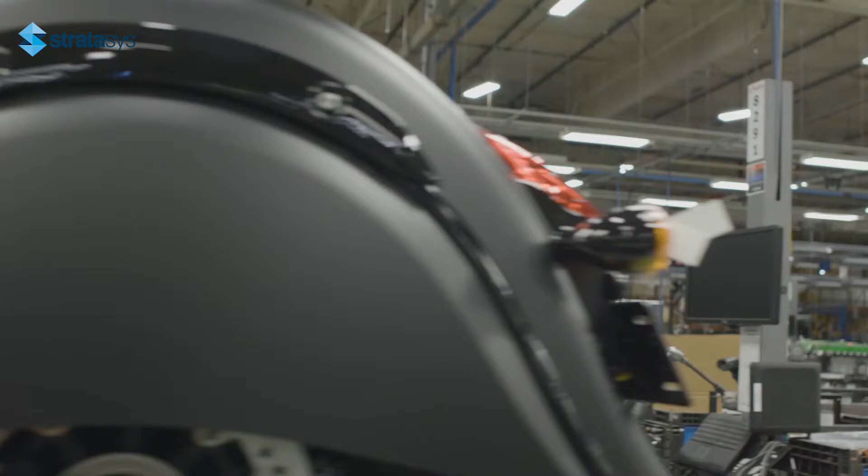3D printing isn't just a technology, but it's a new way of thinking about technology. We face enormous environmental and social challenges in the world today.

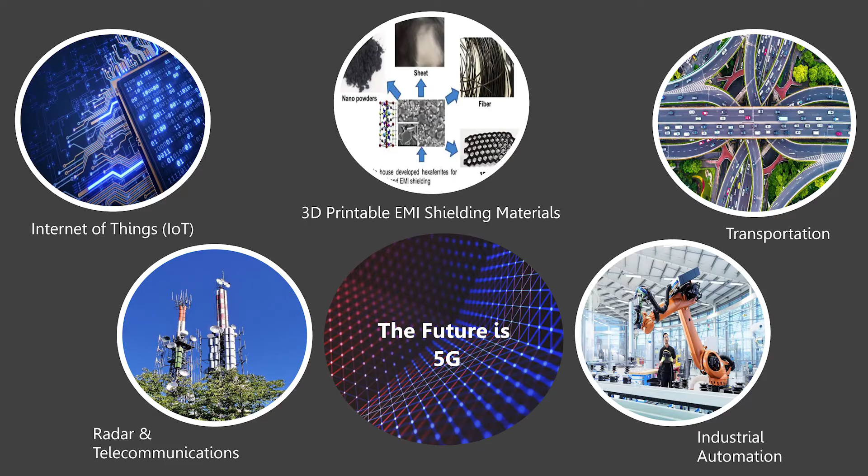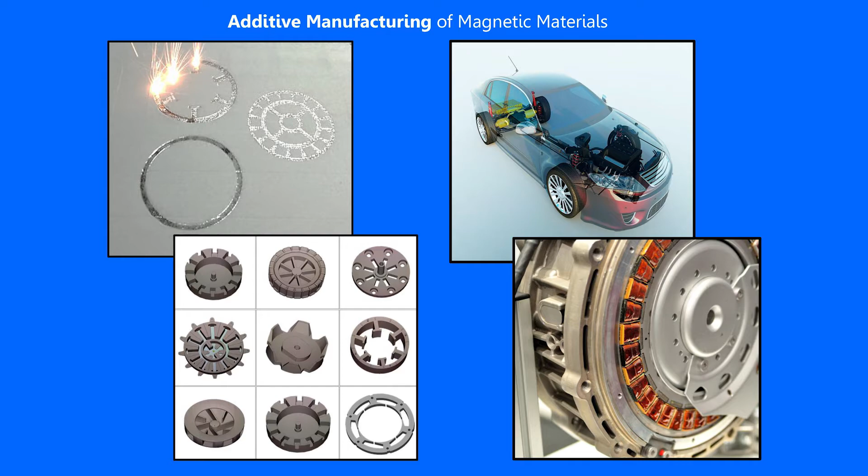3D printing brings together advances in machine learning, topology optimization, powder metallurgy, and machine design to build parts while minimizing manpower, energy, and materials waste. All of these gains can be achieved while producing functionally more powerful products. This is truly a new industrial revolution.

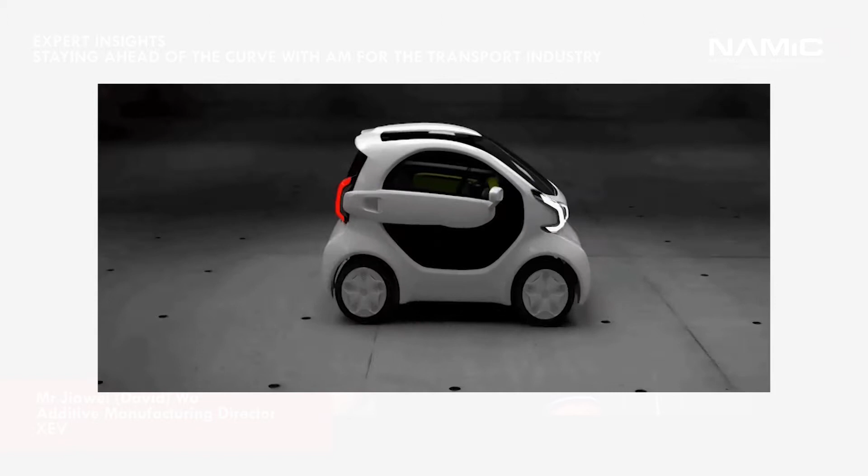There will be a bright future for 3D printing, and it will help us rethink the production process for automaking. And in a very short time, because of the trend of electrical cars and also auto driving, this kind of new technology will change how people think about cars.

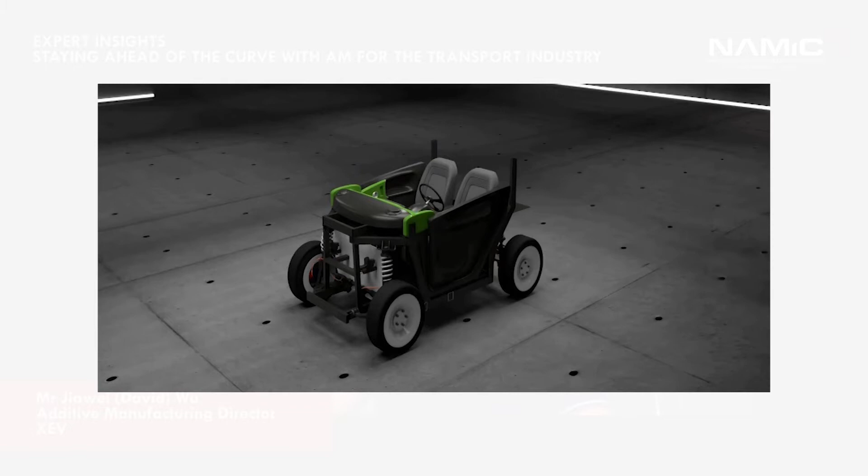You will have the willingness to customize your car in the future once you have the chance. It will be part of your personal identity, I would say.

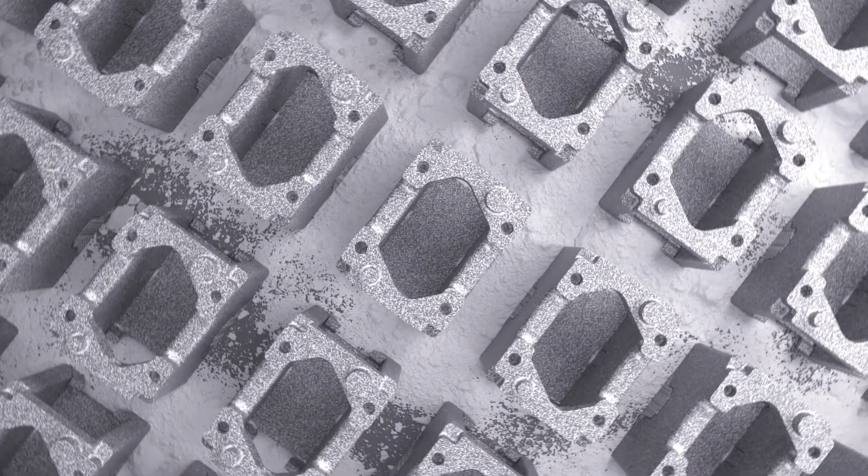Here, I think the largest benefit is simply the efficient way of producing parts, less waste, availability on short notice, reacting on the spot.

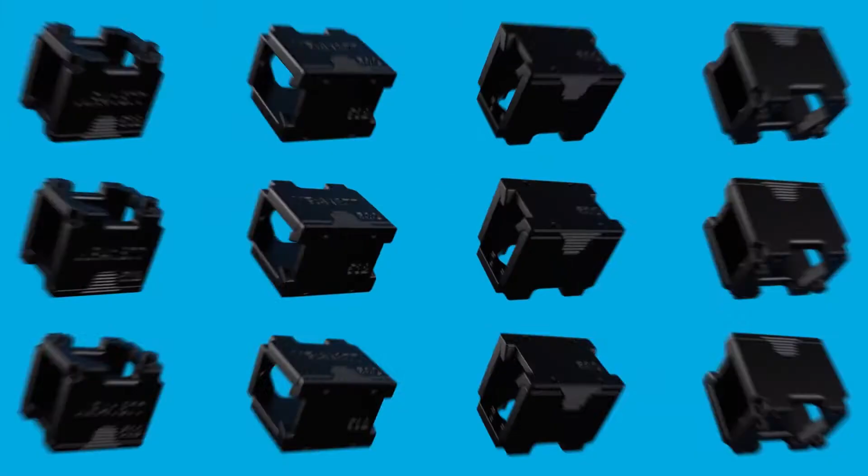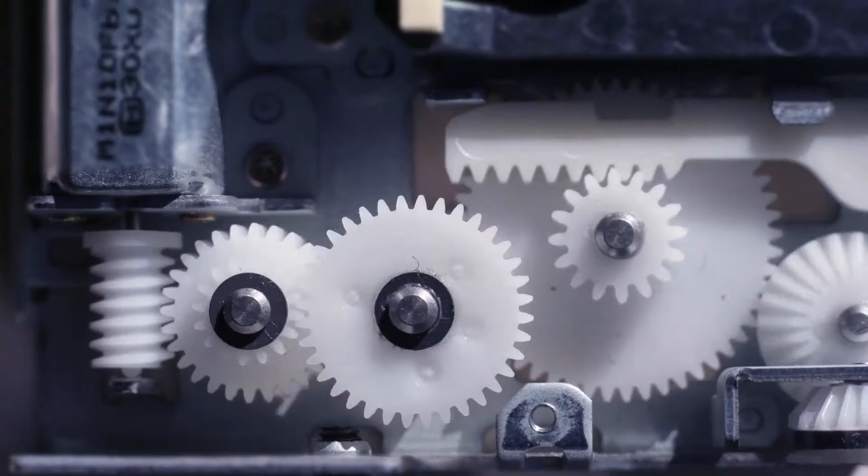Especially when it comes to the transport industry, you see more and more the need for becoming first, or being faster to the market - time to market. And here, additive manufacturing is the only technology which offers this kind of time-to-market approach.

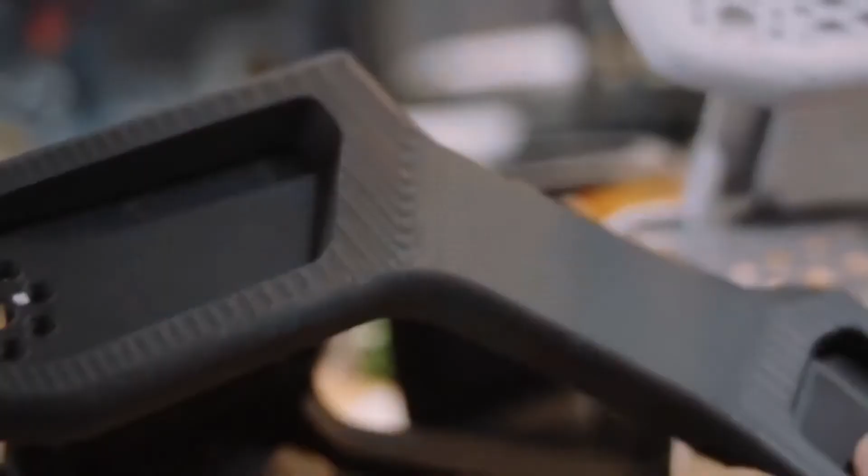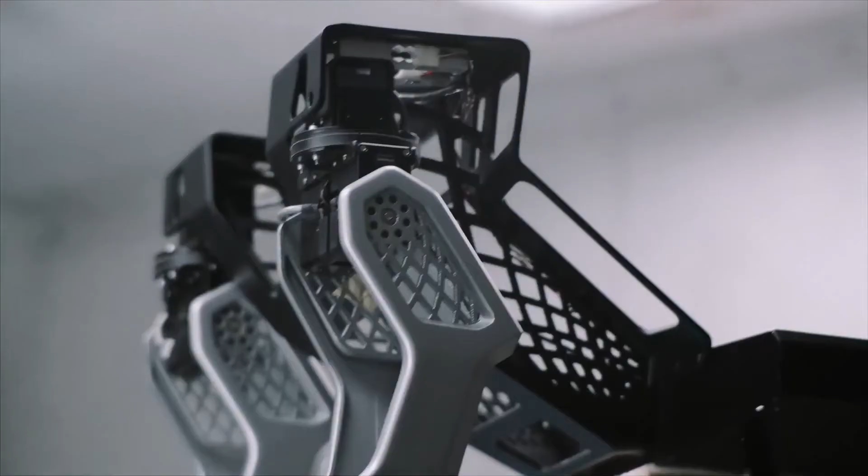I'm really excited about what I call part consolidation. So instead of having assemblies put together by welding or mechanical fasteners, we can actually put all of those things together right from the machine. You can have a part that consolidates mechanical functions, but also electrical, energy, power, data, and sensing all together in one part.

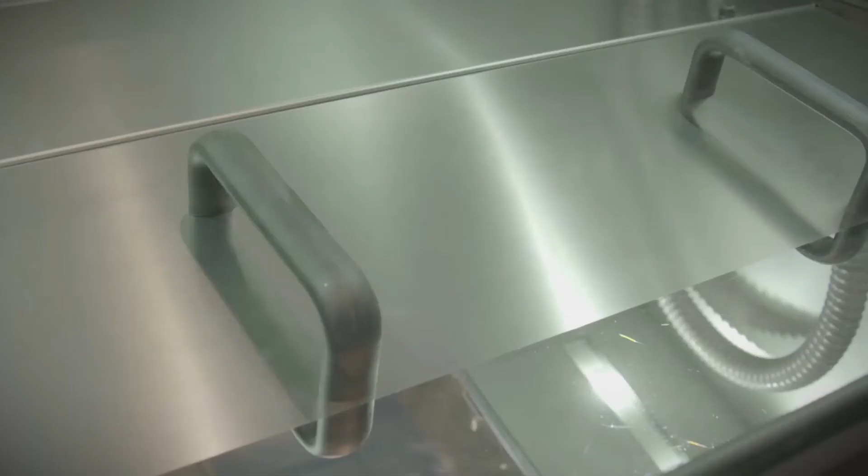There are challenges in terms of the perception of the technology and where it is. It's come so far and so fast that non-technical disciplines within industry have yet to catch up on the potential of the technology, and are sometimes perplexed by hype, which has not always delivered what was promised.

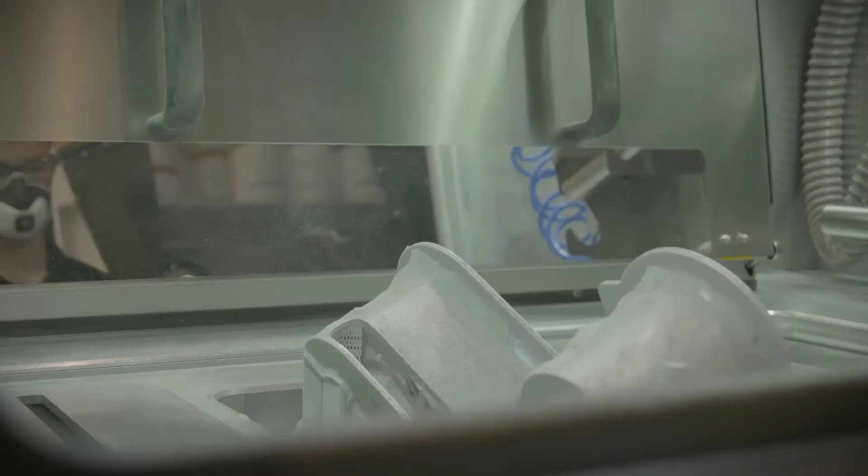I think it's incumbent on us to communicate clearly what is possible and try to diminish some of those myths that are out there. I think one of the challenges of adoption in the transport industry is that you have a method of manufacturing and assembly that works really well.

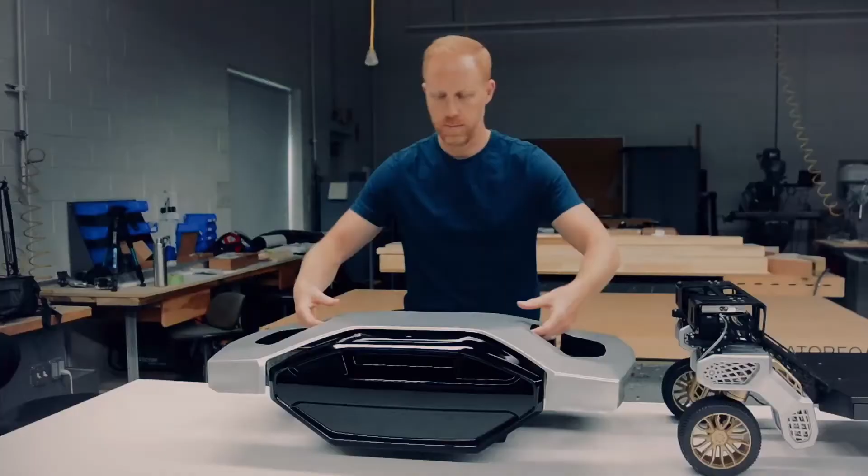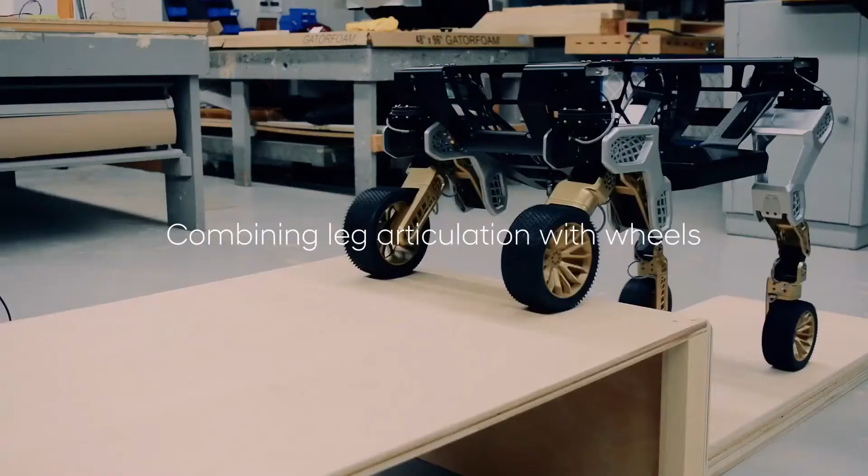The automotive industry, the transport industry for ground vehicles, is able to produce cars at very high quality using the methods of how we make parts, assemble those parts, and then use those vehicles on the road. So I think that's a challenge.

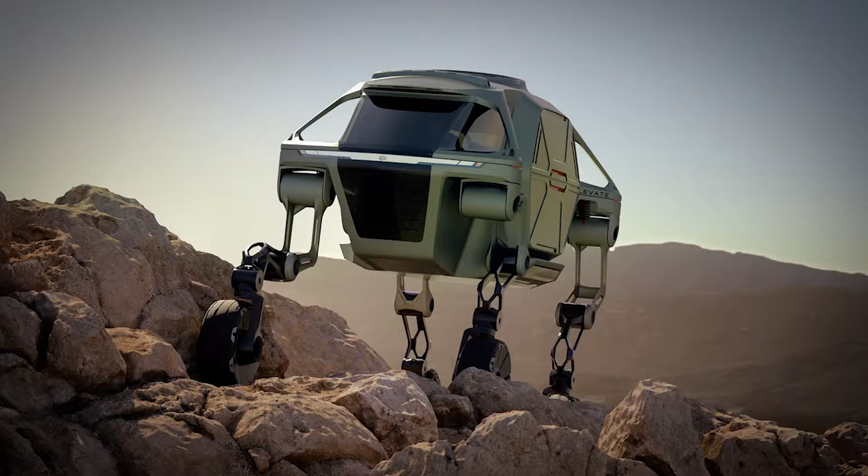We have to look at what are those new use cases, those new markets, those new customers, new types of products where 3D printing can really be of great benefit.

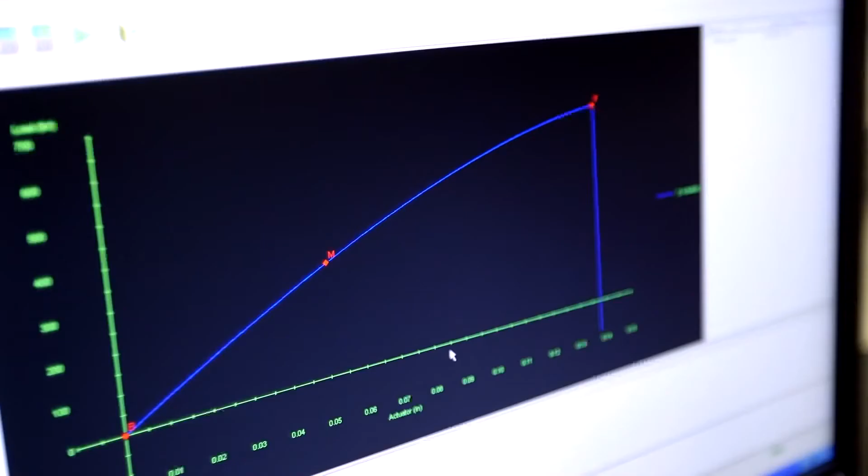The challenges, in my eyes, is still design and design. Today, we still see the wish of customers to replace conventionally designed components for standard manufacturing methods like milling or

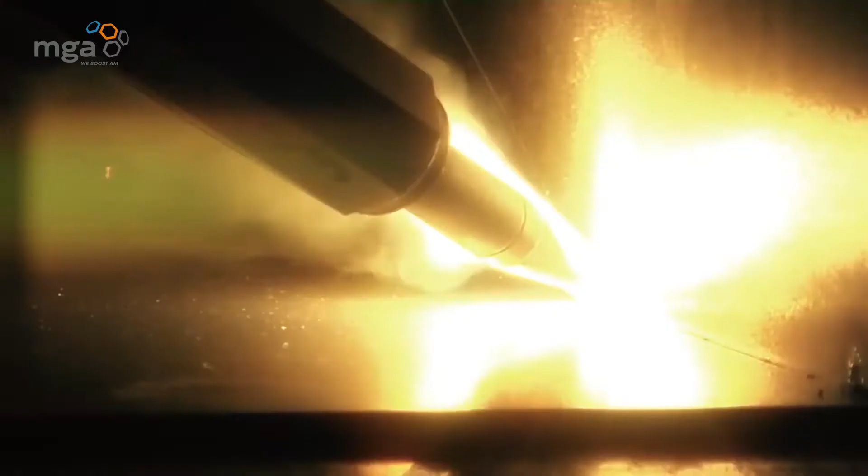injection molding, and try to use the same design for additive manufacturing. And this is not leading to the desired result. The cost per part is still too high when you follow this design.

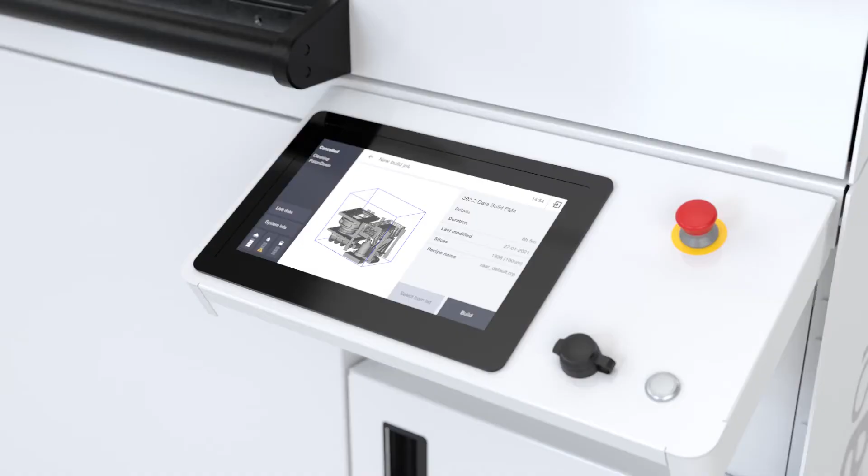So rather than trying to replace an existing design, you should create components meant for the manufacturing technology called additive manufacturing.

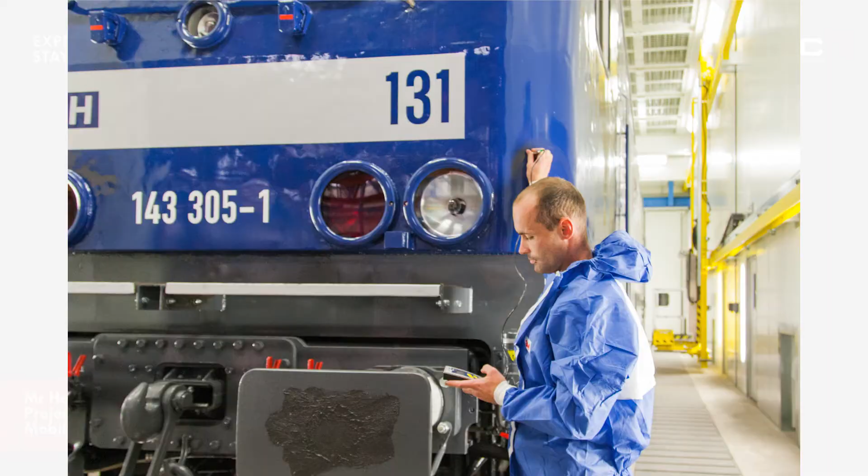There are specific challenges in the transport sector, like safety-relevant components, which must be extensively tested and approved, and we need better and faster yet reliable processes for this.

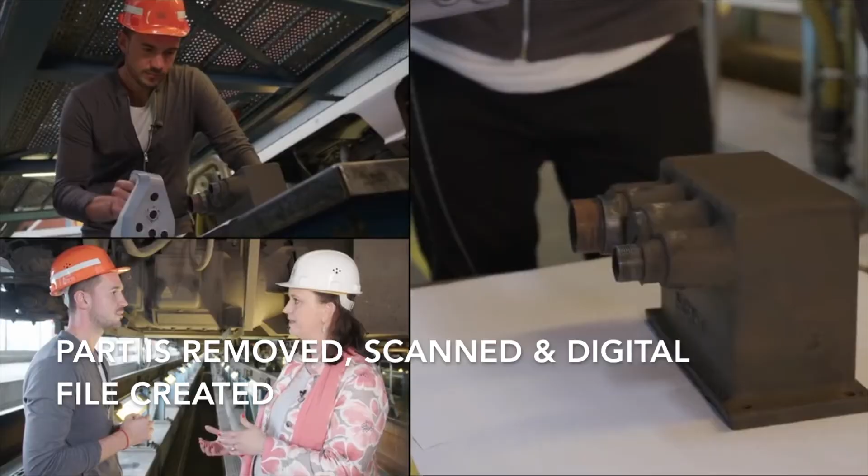Also, additive manufacturing is, at least in the transport industry, mainly pushed by operators today, not the manufacturers of vehicles and infrastructure. But operators are not actually meant to be manufacturers, so they don't often have the CAD data and the engineering data, and they have specific challenges in that, in generating these by reverse engineering.

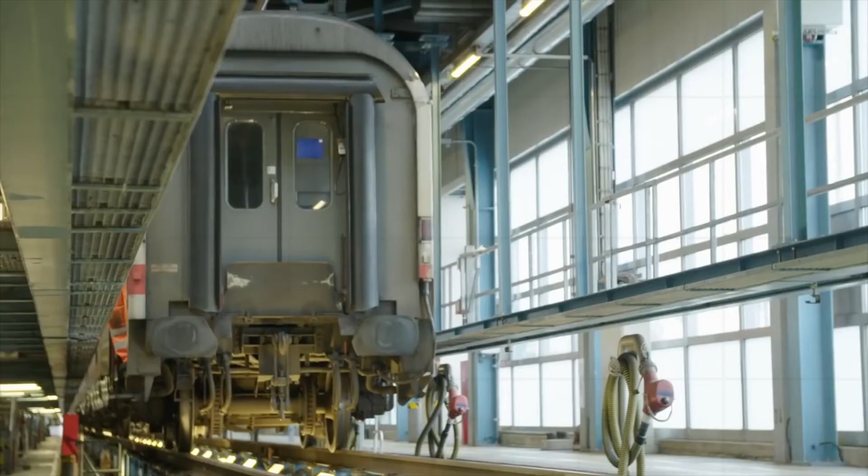Today, because of the cost structure of 3D printing, the main application areas have initially been in fields such as motorsport, and hypercars or supercars, where performance is paramount and where the agility of production to be able to iterate rapidly is really important. I think most of the additive manufacturing parts which have already been done in Germany are well known,

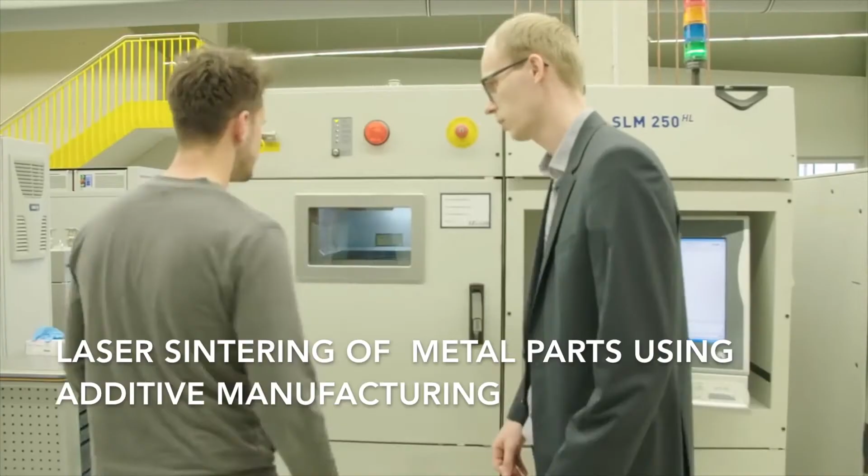for example, by our member company Deutsche Bahn and others - for example, interior components like panels, parts of seats, components of the traction system, of the car body, of the bogie wheel set, and so on.

Even safety-critical parts of brakes are in use today.

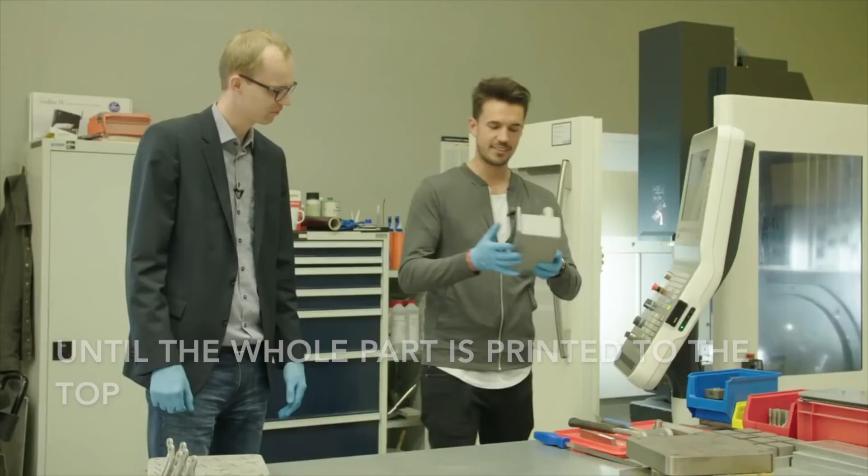The automotive industry is all about scale and minimizing per-unit cost, but electric vehicles are still at a nascent stage in their development and can benefit from small batch production. In these scenarios, 3D printing can be used for design experimentation, prototyping, and trial production runs.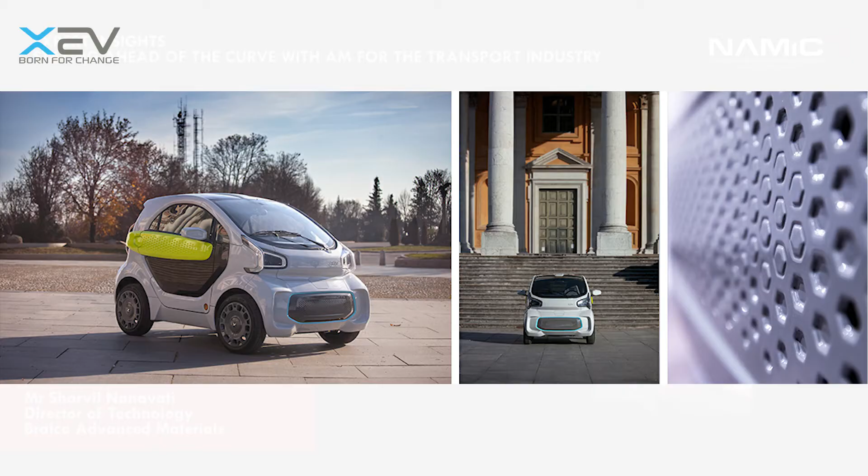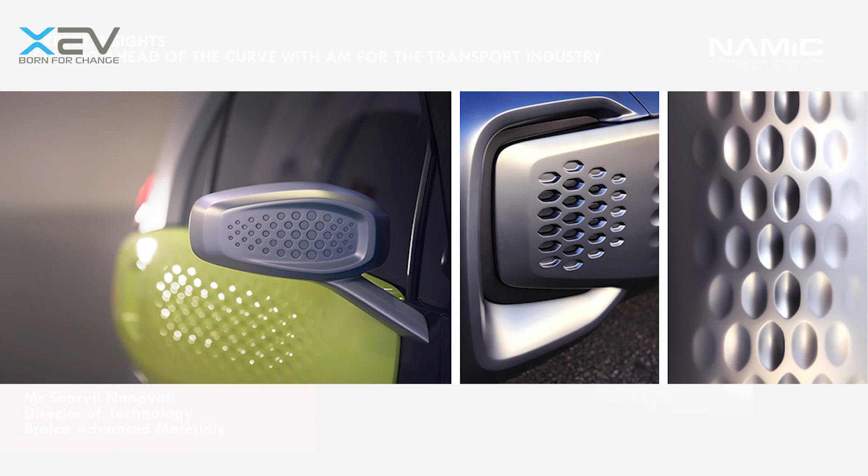Another interesting application of 3D printing is in weight reduction. Lighter vehicles get better range per charge, so we can use topology optimization alongside 3D printing to build smaller and lighter parts without sacrificing their performance.